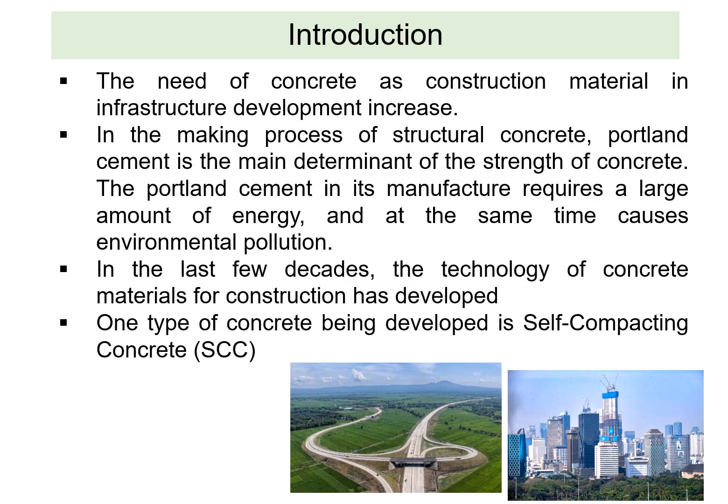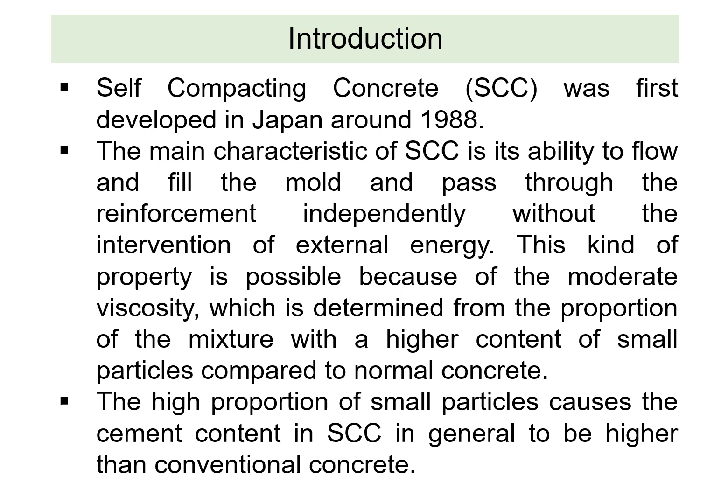Self-compacting concrete was first developed in Japan around 1988. The main characteristic of SCC is its ability to flow and fill the mold and pass through the reinforcement independently without the intervention of external energy. This kind of property is possible because of the moderate viscosity, which is determined from the proportion of the mixture with a higher content of small particles compared to normal concrete. The high proportion of small particles causes the cement content in SCC in general to be higher than conventional concrete.

In the manufacture of 1 kilogram of cement, the amount of CO2 emissions is equivalent to 0.9 kilograms. A practical step to maintain environmentally friendly concrete manufacturing is to reduce the amount of cement used. One method to reduce the use of cement is to replace some of the Portland cement with fly ash. The cement replacement with high amounts of fly ash has been carried out for a long time, even at replacement levels of more than 50%, known as high-volume fly ash concrete, HVFAC.

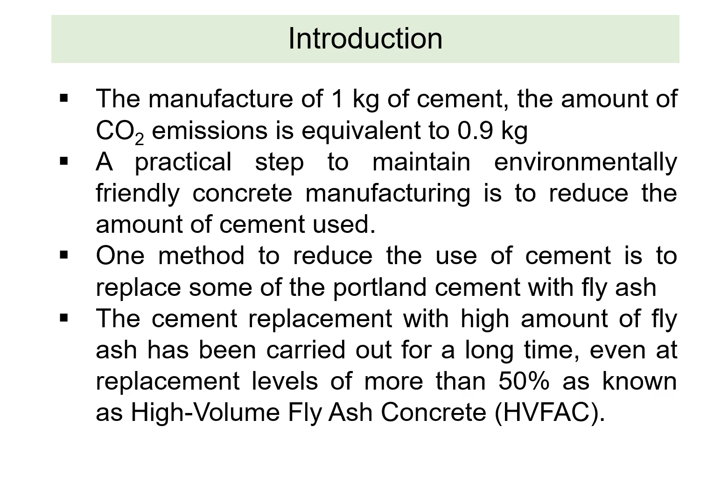High-volume fly ash self-compacting concrete, HVFA-SCC, is a combination of self-compacting concrete that has the ability to flow and compact itself without mechanical compaction, with the concept of high-volume fly ash that replaces most of the Portland cement up to 50%. The use of high amounts of fly ash not only improves the rheological properties of SCC, but also significantly reduces costs. From an environmental perspective, HVFA-SCC significantly contributes to carbon emission reduction. The cement substitution can significantly reduce concrete CO2 emissions.

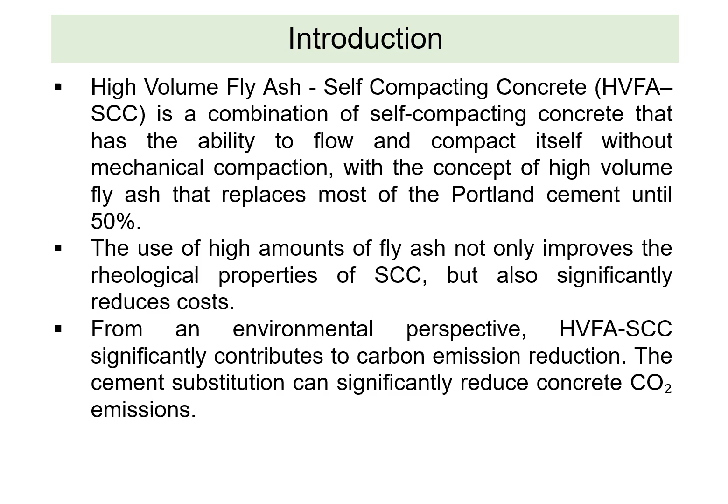Research aim. 1. Analyze the costs and emissions of normal concrete and HVFA-SCC. 2. Compare the costs and emissions of normal concrete and HVFA-SCC. This study will provide a comprehensive overview of the potential cost savings, carbon emission reduction contributions, and the feasibility of implementing HVFA-SCC in construction projects, particularly in developing countries like Indonesia, which has abundant fly ash supplies.

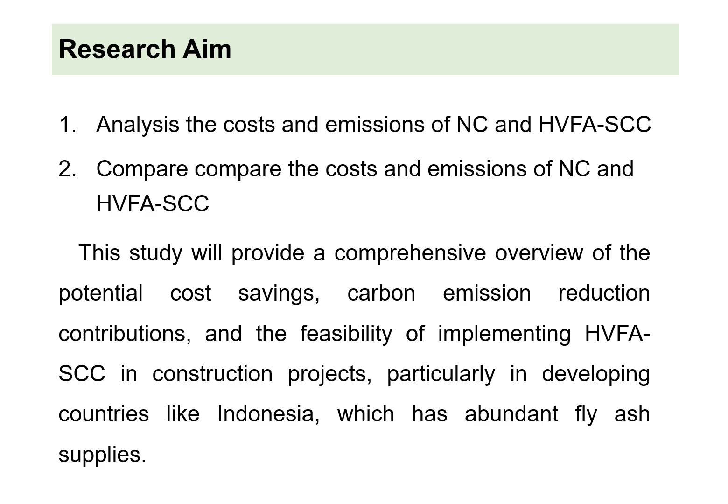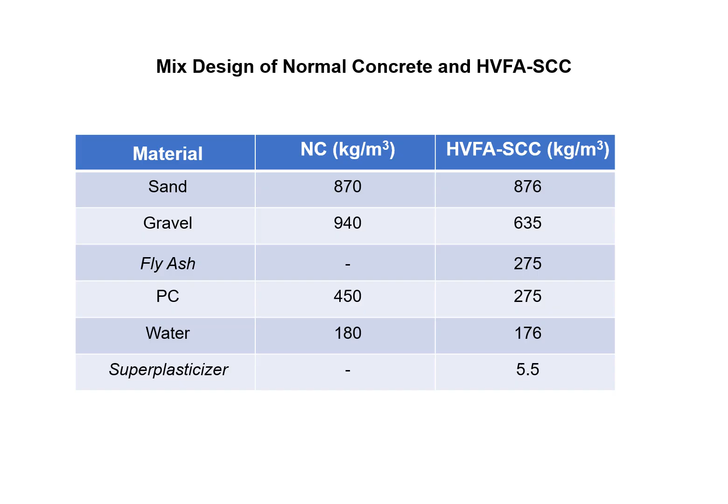Mix design of normal concrete and HVFA-SCC. For NC: sand 870 kg per cubic meter, gravel 940 kg per cubic meter, cement 450 kg per cubic meter, and water 180 kg per cubic meter. For HVFA-SCC: sand 876 kg per cubic meter, gravel 635 kg per cubic meter, cement 275 kg per cubic meter, fly ash 275 kg per cubic meter, water 176 kg per cubic meter, and superplasticizer 5.5 kg per cubic meter.

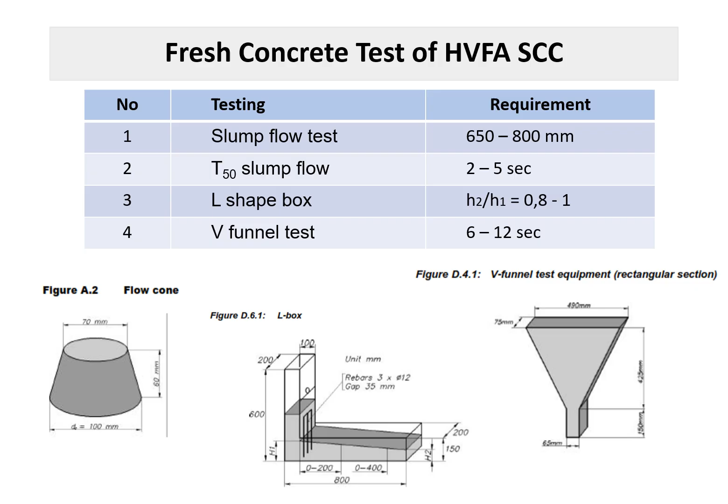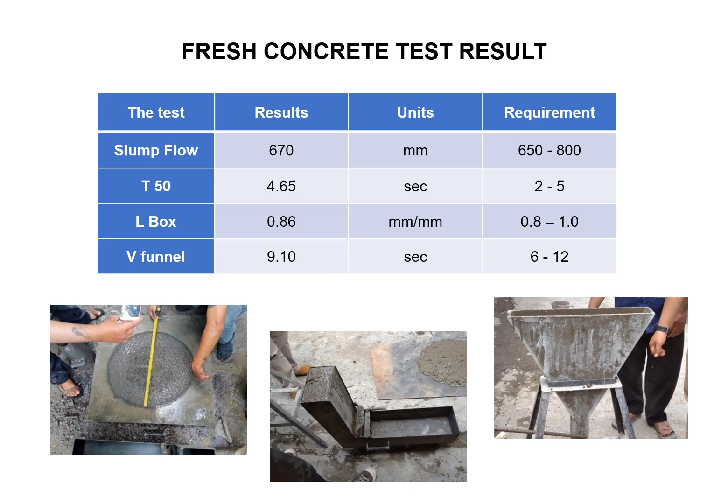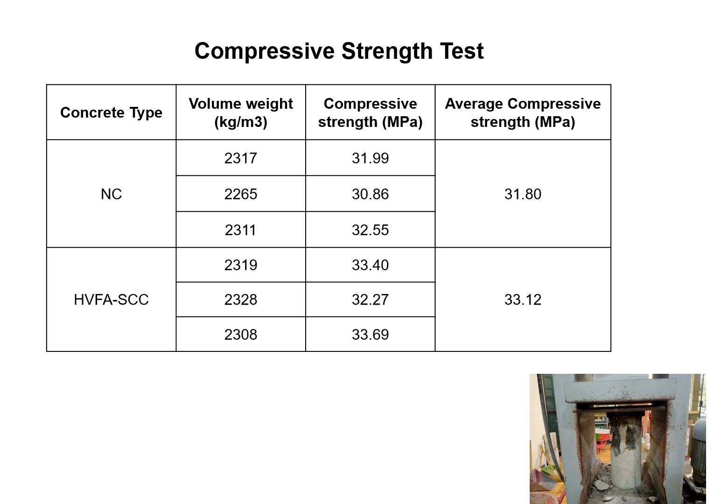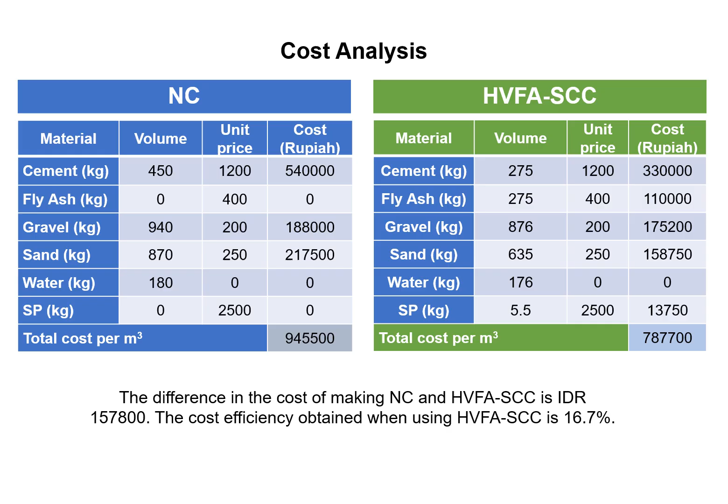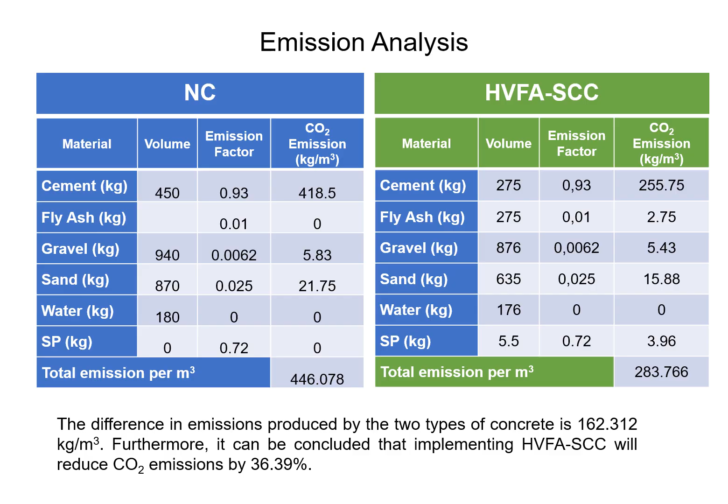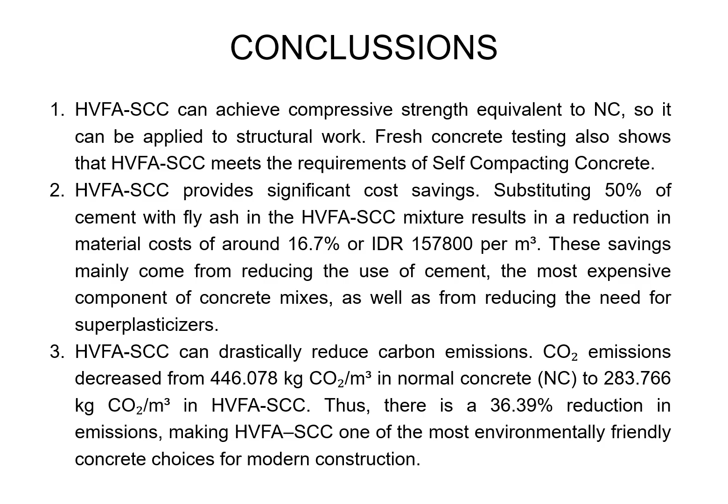Conclusions. 1. HVFA-SCC can achieve compressive strength equivalent to NC, so it can be applied to structural work. Fresh concrete testing also shows that HVFA-SCC meets the requirements of self-compacting concrete. 2. HVFA-SCC provides significant cost savings. Substituting 50% of cement with fly ash in the HVFA-SCC mixture results in a reduction in material costs of around 16.7% or IDR 157,800 per m3. These savings mainly come from reducing the use of cement, the most expensive component of concrete mixes, as well as from reducing the need for superplasticizers. 3. HVFA-SCC can drastically reduce carbon emissions. There is a 36.39% reduction in emissions, making HVFA-SCC one of the most environmentally friendly concrete choices for modern construction.